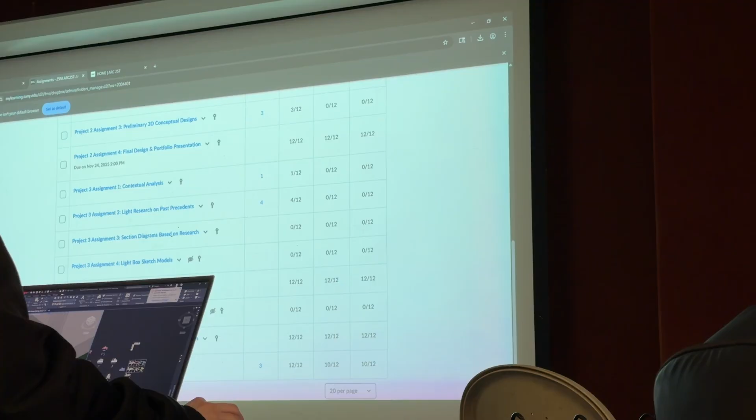So you need to locate a building, so he winds up locating this building here. Right now I just need a box of what space. Monday I'll go over how to deal with this.

I need to resubmit these, but so this is an oval. That's the setback of the oval. This is the setback from the business building. So where's the building gonna sit in setback? You wouldn't put a building right up against the sidewalk. That doesn't occur. You wouldn't put the building in the space, because it's in the space. It wants to be on the space.

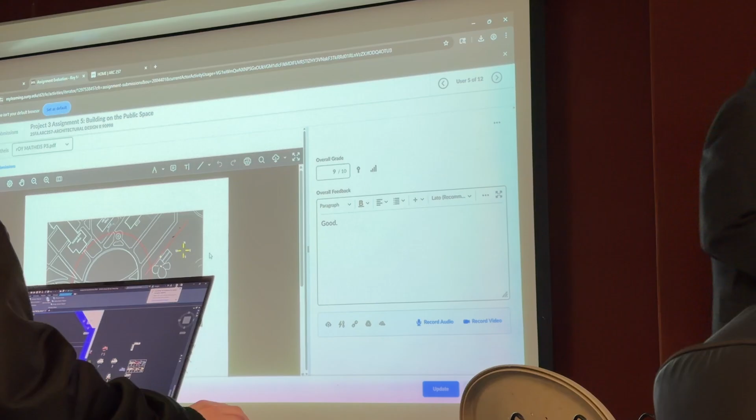So this is an example of what people are submitting. I want you guys to do a preliminary one first, based on your analysis, because we're out of time. The class is over at 12:05, so I'm like, where am I gonna go in 10 minutes? And then why do you want to put them, and eventually put north, south, east, and west.

Now, one day, after we do our quick analysis, I have to sit down and, sorry, can you say that again? So just locate, where do you want, what space do you want to put your building? And where do you want to front it? And just draw north, south, east, and west, yes? We only need one, we don't need like three. No, just one.

Monday I'm gonna go through that lecture. And by the way, I took some time because I wanted to make sure that the representation of the project was up to speed, all right? I'm assuming in design one, you do plans and sections and elevations. No? Okay, but we relearn them.

This is a much more complicated building, much more complicated than the stuff you were doing in design one, so yeah, maybe it's more challenging. It's certainly more spatial.

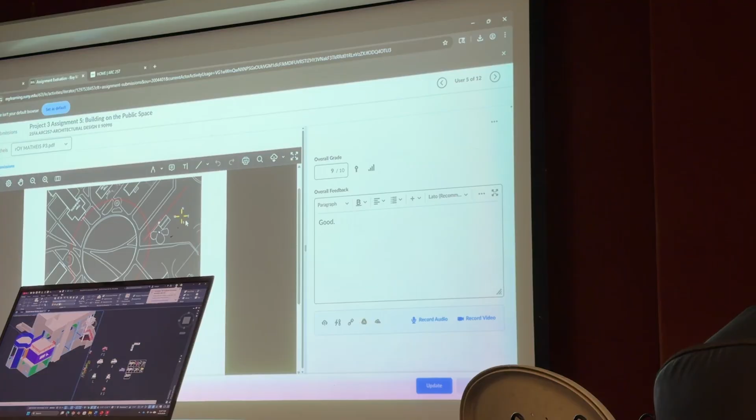So pick a public space and you can submit that. Monday I'm going to come in and talk about how do you organize the building, how do you think about the public space, and how you think about the natural environment. So that you can do Sunday night for Monday, yes.

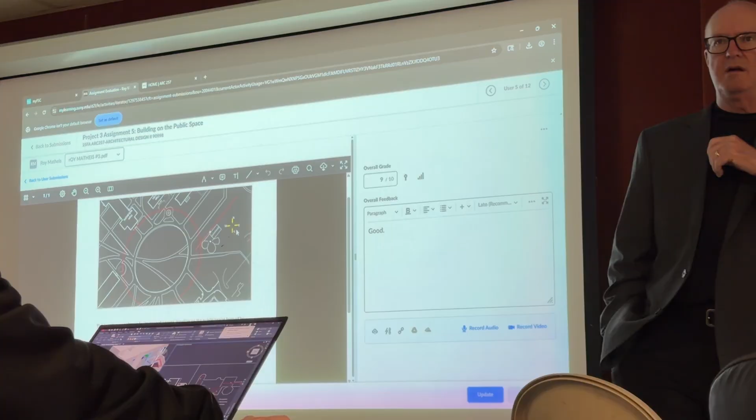Do the four of us have to have the same location? No, everyone's doing an independent project, yes. Ryan, yes, how much are the setbacks? Well, good question. Let me give you an example.

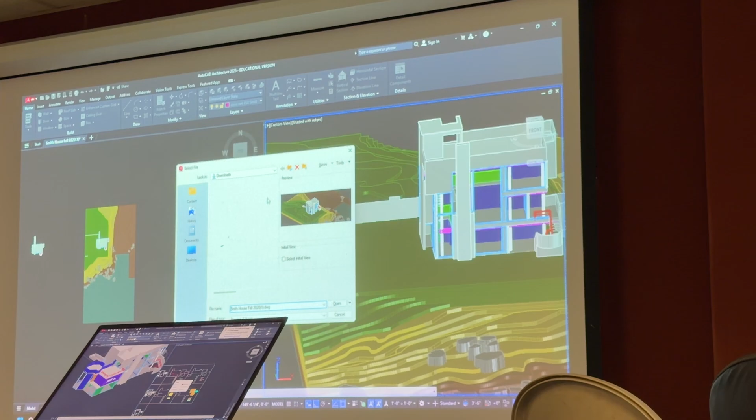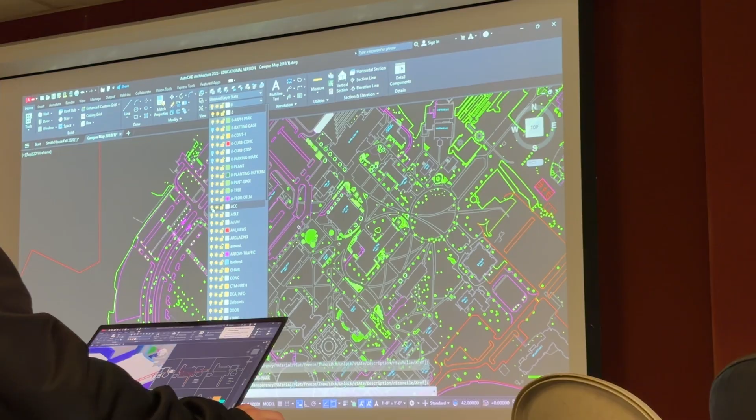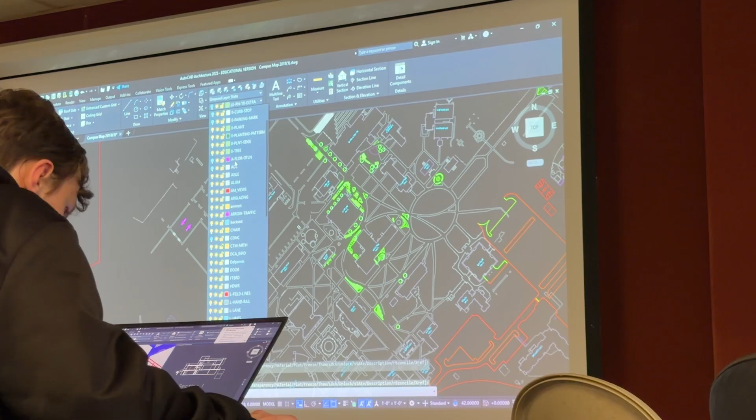So let's jump on here. Okay, so let's say, for example...

Let's say this is gonna be your space. So what you want to do is, you're gonna map out...

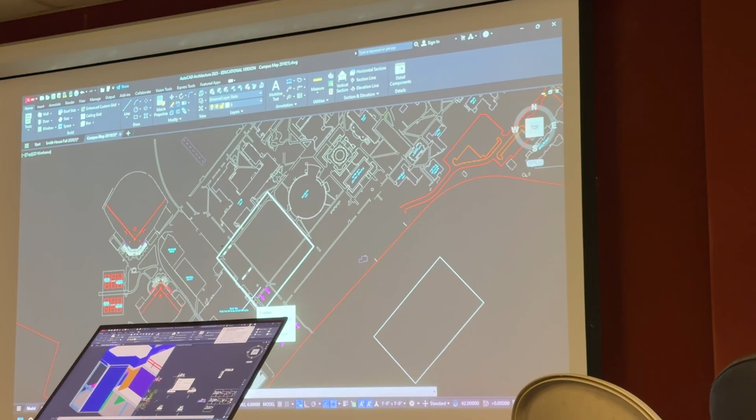That may be your public space, that's the front of the building, that's the front of the building, that's the front of the building. Your building, you may decide wants to be placed here.

Without dealing with scale a whole lot. So this would be the building, and that would be the space.

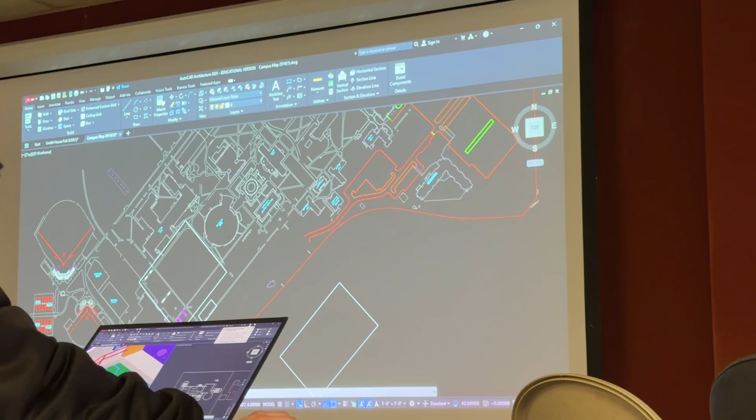Right now, we want a preliminary idea. Let's say, for example... it's a little funky here.

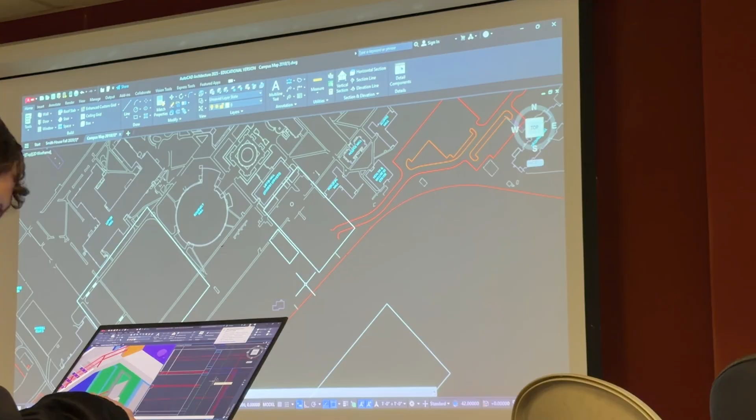That may be the public space, and this may be your building. But don't worry about the parking, let's say something like here. So you want to build it over here.

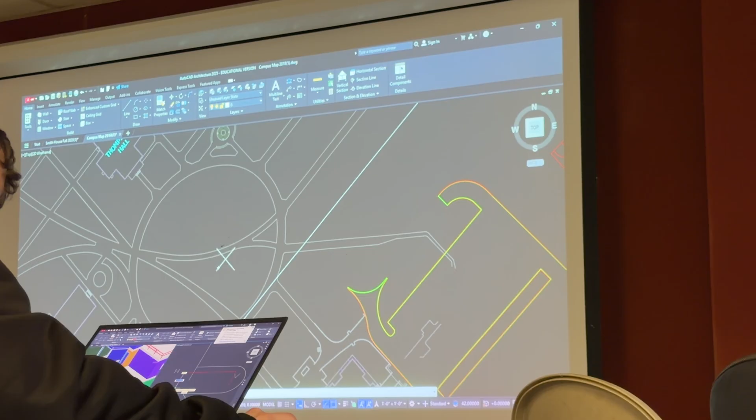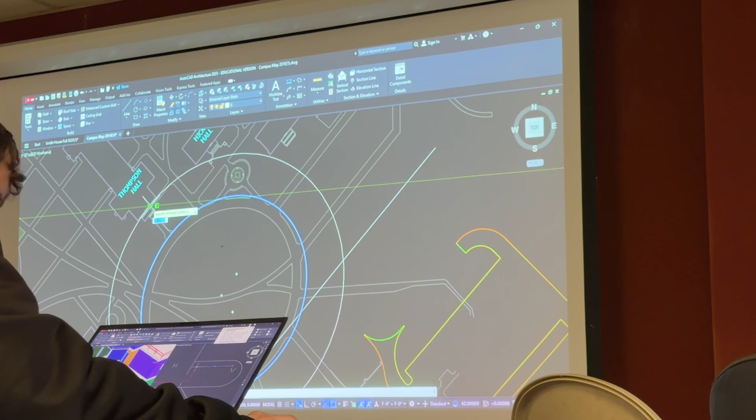That's a setback line. Let's say I want to put an oval in. Front, front, front, front. I don't have to worry if this is moved over.

So where would I put a building that sat here? Somewhere here, because I've got, this is a space here. That's the setback from that road, and I got the oval.

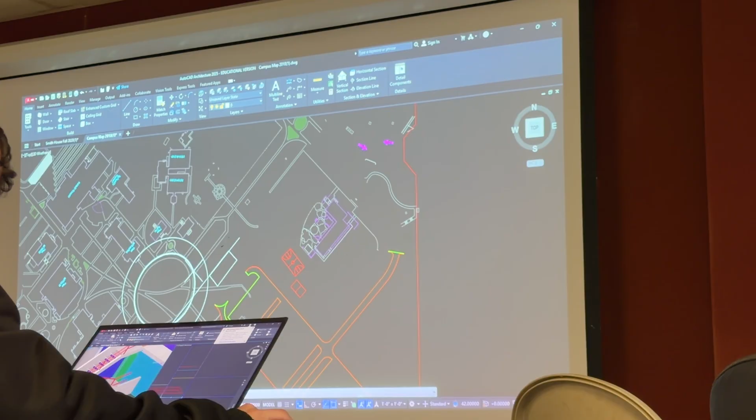If I move it closer to here, the problem is I'm in this corner setback. So this one has two sets of setbacks. So when I think of it, first I'm gonna map out the space, like where's the space? And I'm gonna put the building on the space, not in the space. That could be due Monday, that could be due Sunday night.

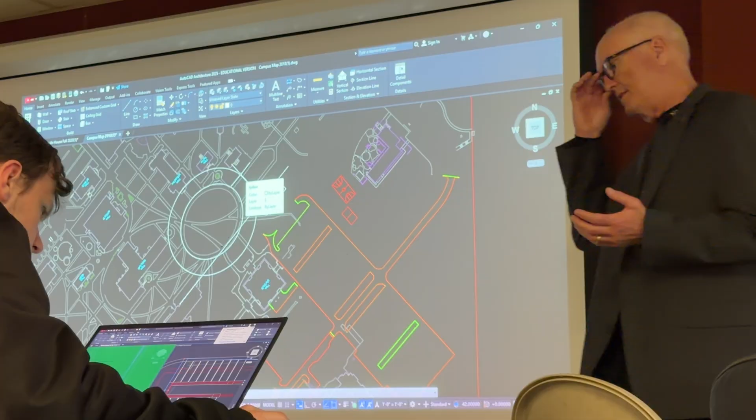So we'll take a look at that, because everyone's gonna be working on Project 10. Monday I'm gonna come in and do a quick lecture on how to organize this building that has the sacred parts, has the sun problem, has this, the boxy functional stuff.

So when I'm all done, there's a lot going on. It's complicated to organize it, and then once you organize it, the project gets to be simpler, because then you constrain it. And as soon as you constrain projects, especially ones that are this kind of free-flowing, as soon as you start constraining it, it becomes much more solvable. Without constraining the project properly, you're going to have a mess.

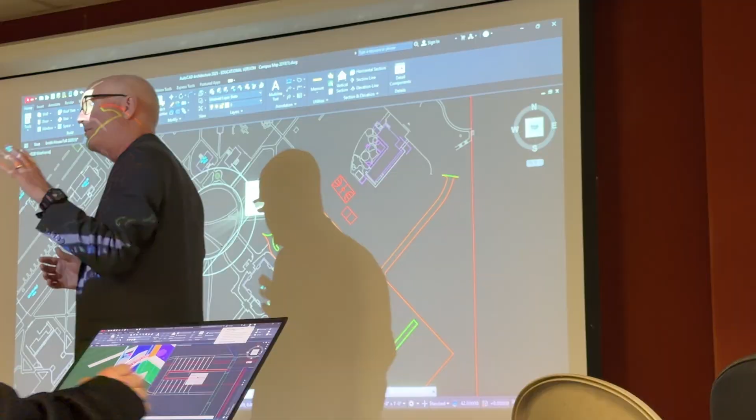So as a designer, I'm gonna tell you, this project, the first one generates lots of ideas. The second one has this fit issue. This one, in addition, has non-orthogonal, curvilinear shapes and forms.

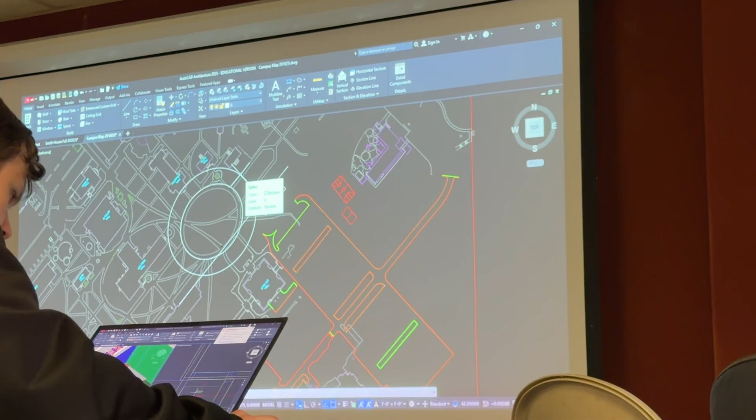You're gonna learn how to constrain problems to solve them, because there's gonna be complex, wicked problems out there that you're gonna look at and you're like, how do I approach this? There's too much going on, it's overload. And if I didn't give you a strategy, I'd have what I'll even describe as a complete mess. It would take you 3 times as long as what you need, and we don't have that kind of time in your class. So I'm gonna say, this is how I would approach it as a constraint problem.

And as soon as I constrain the thing, you're gonna be able to solve it easier. It's sort of like designing a house and someone's talking about, I want to put windows in the wall, and I'm like, first let's put the room in the house. And then once the room's in the house, let's put some furniture in so the thing functions. Now all of a sudden the windows become obvious because they're highly constrained. They can only go in a couple spots.

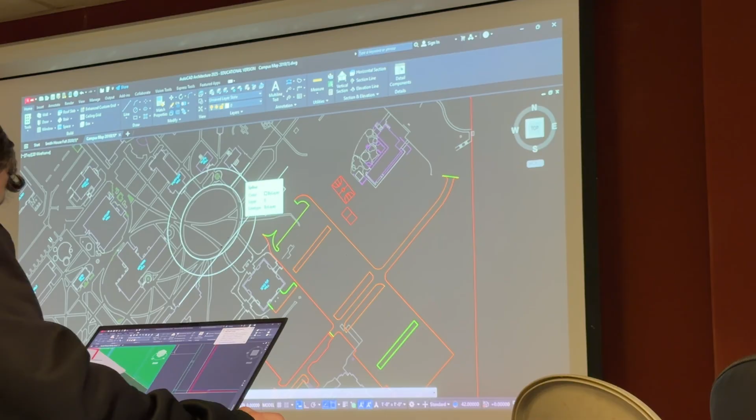So is there really a lot of design to that constraint problem? Not anymore. But if you start out trying to solve the windows without solving the other thing, you're screwed. It's like, where do you put a door in a house? Yeah. So now, is design about this? Yeah, these wicked, hard, not obvious problems, like, I need to put an addition on the back of my house with side yard setbacks and rear yard setbacks, and yeah, you can only put it in one spot.

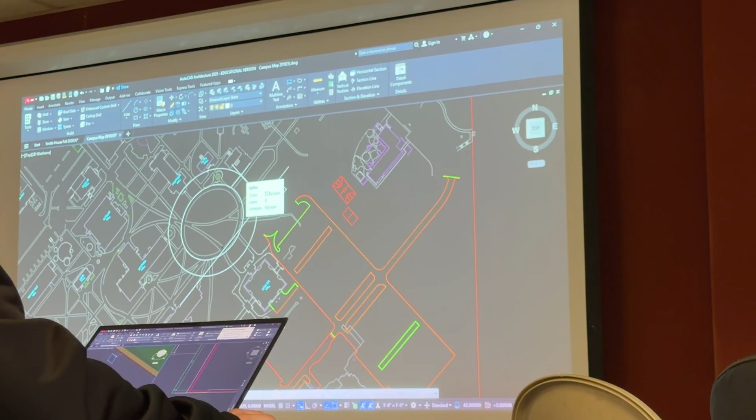Well, that's not a lot of design. The project's constrained from the get-go, and there's no real design. It kind of just happens from the existing patterns and what the site tells you where you can't go. All right, I know this all sounds too theoretical, but architectural design is really complicated stuff. You folks, right now it's your first year essentially, and you're just feeling it out. But if you like this stuff, yeah, that's one of the things that makes architecture not so...